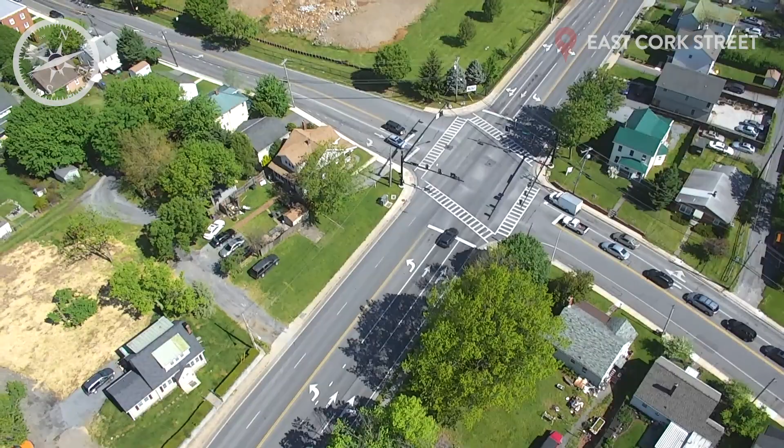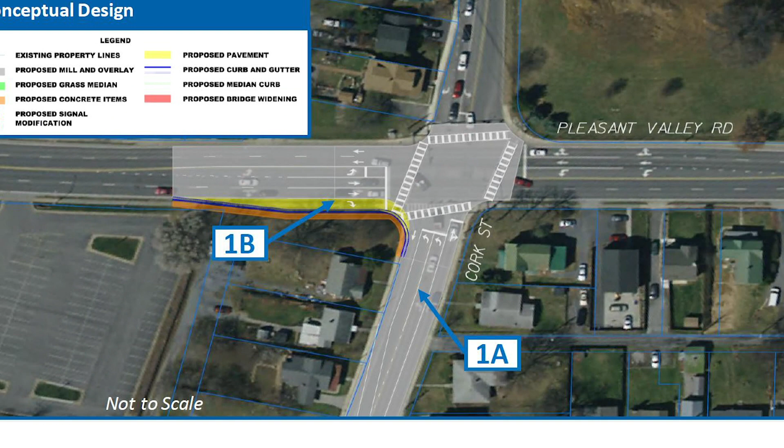At the northern end of the corridor is the Cork Street and Pleasant Valley Road intersection. Two improvements are proposed at this location: adding a second left turn lane on the westbound approach, and adding a dedicated right turn lane on the northbound approach. This additional capacity and updated signal timing will better accommodate turning vehicles and reduce delay during the peak period.

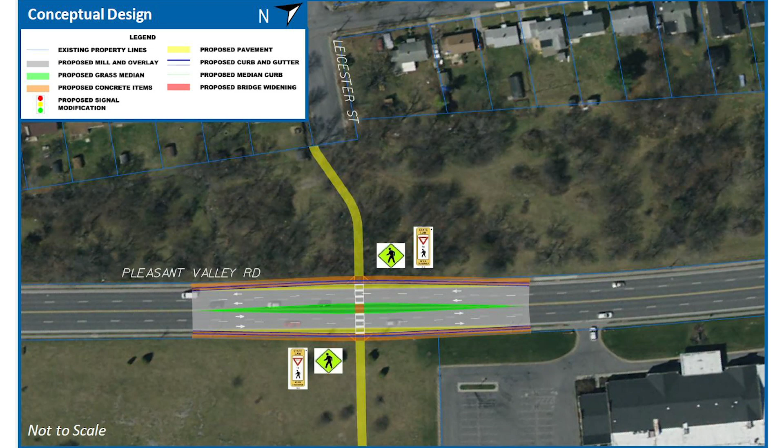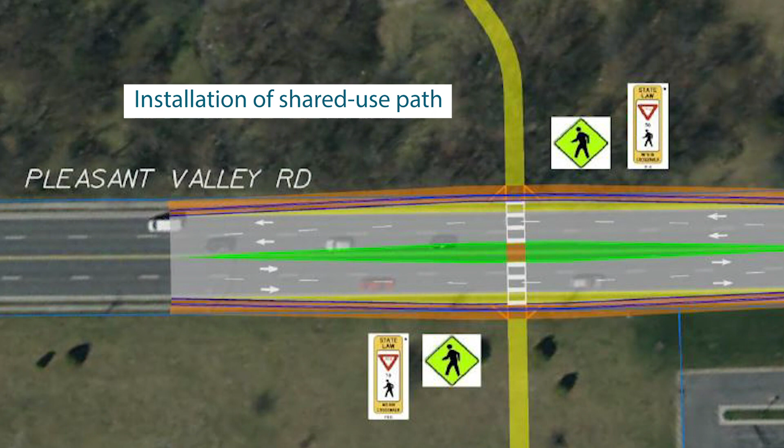Between Cork Street and Hollingsworth Drive at Leicester Street, two improvements are considered: installation of a mid-block pedestrian crossing area, and installation of a shared-use path for pedestrian access between Leicester Street and Jim Barnett Park.

These improvements will provide a dedicated crossing area and address safety concerns for pedestrians along this stretch of Pleasant Valley Road. The shared-use path will improve connectivity between the residential community on the west and the park amenities on the east. The mid-block crossing may be an interim improvement.

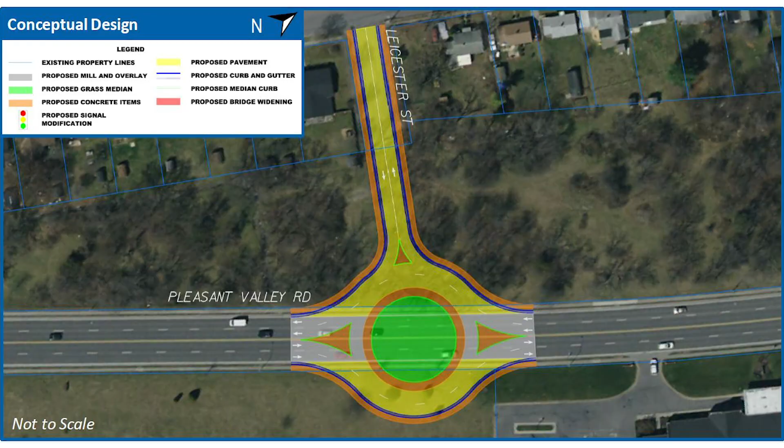At the same location between Cork Street and Hollingsworth Drive at Leicester Street, a potential long-term improvement consists of the installation of a two-lane roundabout. The roundabout intersection would include pedestrian accommodations and vehicular access to Leicester Street. The roundabout and a slight roadway alignment shift will address commonly observed speeding on this segment of the corridor. Future vehicular access to Jim Barnett Park may be accommodated with this improvement.

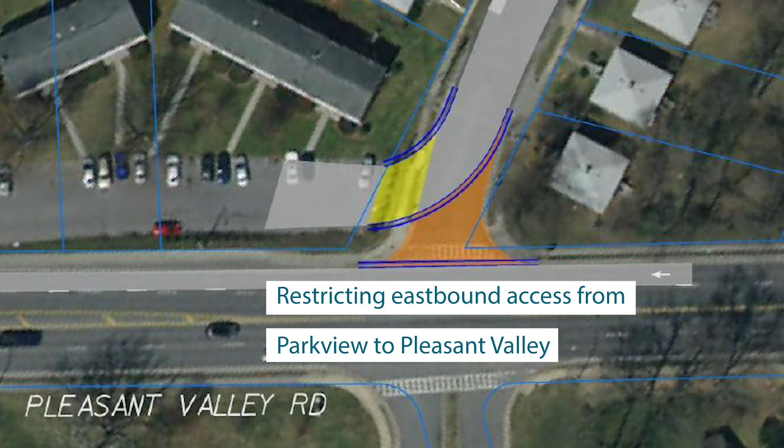At the Parkview Avenue and Pleasant Valley Road intersection, the proposed improvements include restricting eastbound access from Parkview Avenue to Pleasant Valley Road, and closing access from residential units to Pleasant Valley Road. The eastbound section of Parkview Avenue will be turned into a cul-de-sac which connects to the adjacent multifamily units.

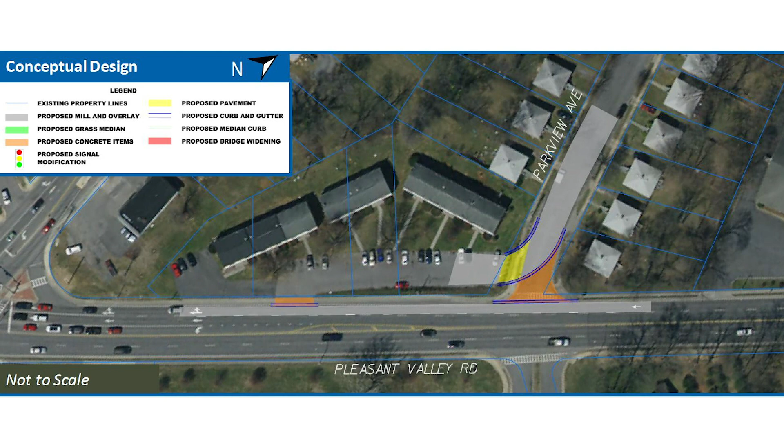Restricting access would require traffic to reroute to adjacent intersections to access Pleasant Valley Road, either Millwood Avenue to the south or Hollingsworth Drive to the north. The improvement eliminates challenges of poor sight distance from Parkview Avenue and reduces the number of potential vehicle conflicts with turning vehicles.

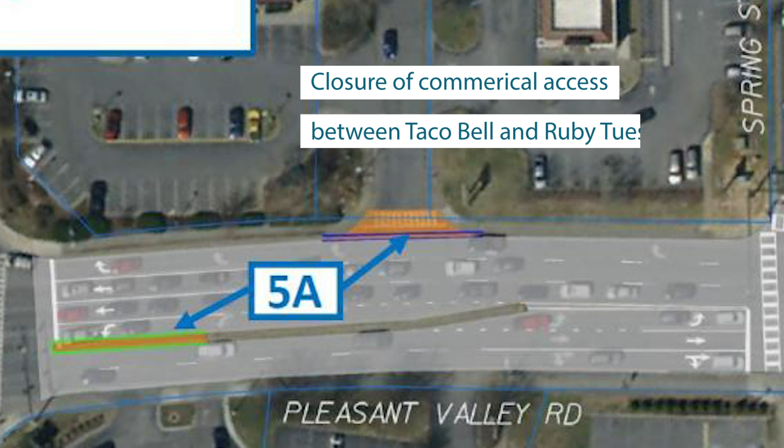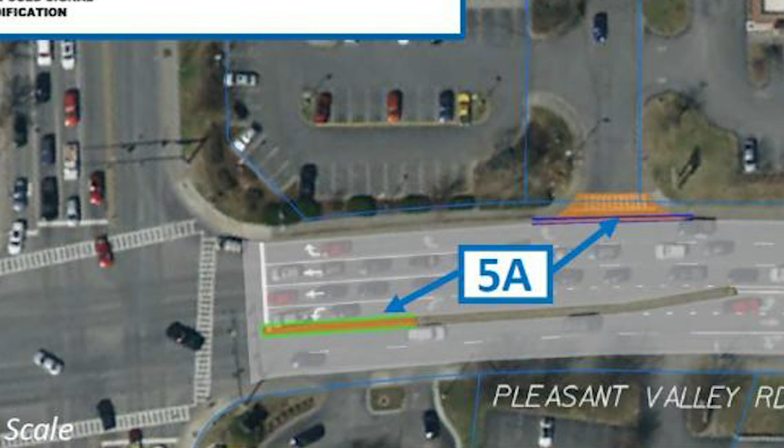Farther south, between Spring Street and Jubal Early Drive, the concept includes closure of the commercial entrance between Ruby Tuesday and Taco Bell, and extending the concrete median on the southbound Pleasant Valley Road approach to restrict access to Starbucks. The concrete median would allow the southbound left turn lane to accommodate left-turning vehicles to Jubal Early Drive. This improvement will eliminate turning vehicle conflict points and address some crashes in the vicinity of the Jubal Early Drive signalized intersection.

This improvement concept also includes removing the northern crosswalk at Spring Street to eliminate the redundant pedestrian crossing.

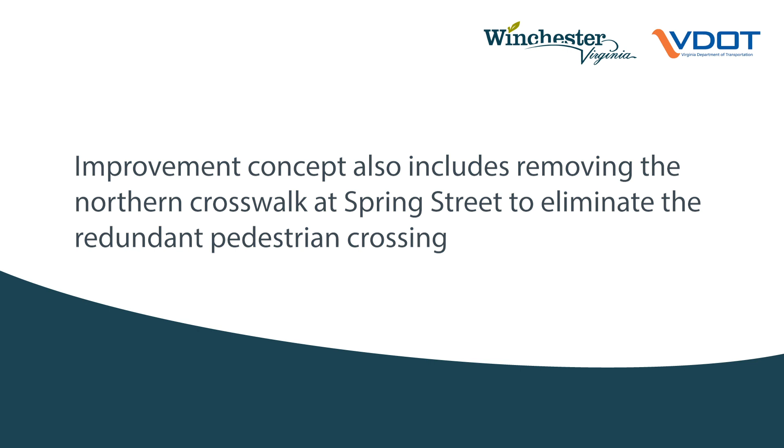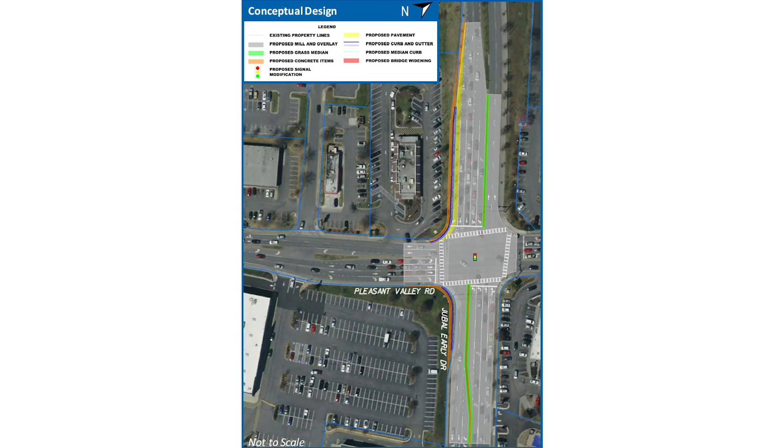The Jubal Early Drive and Pleasant Valley Road intersection is one of the highest intersection crash locations in the corridor. To address the safety and congestion concerns, this project proposes adding a second left turn lane on the westbound and eastbound approaches. Additional capacity for turning vehicles will accommodate peak hour volume and reduce vehicle queues on both Jubal Early Drive approaches.

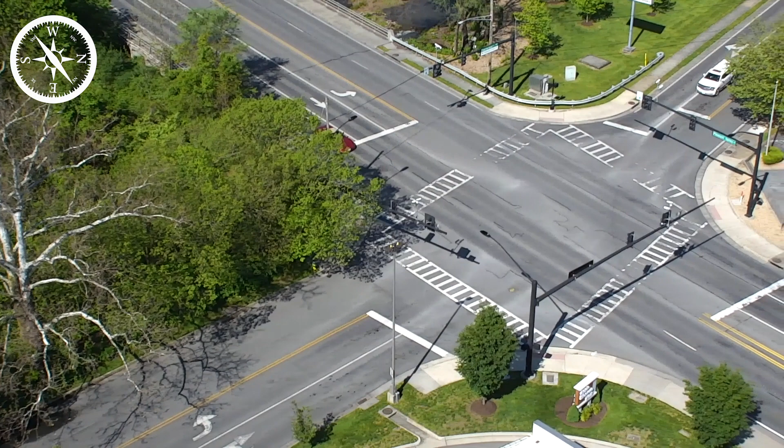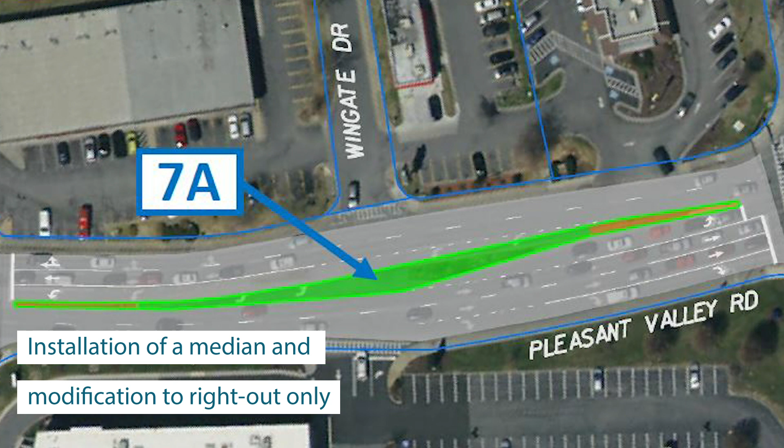Farther south at Wingate Drive and Featherbed Lane, the proposed concept includes the installation of a median and modifying Wingate Drive and Shopping Center Drive access to right in, right out, to reduce turning conflicts and potential crashes at one of the highest U-turn locations in the corridor.

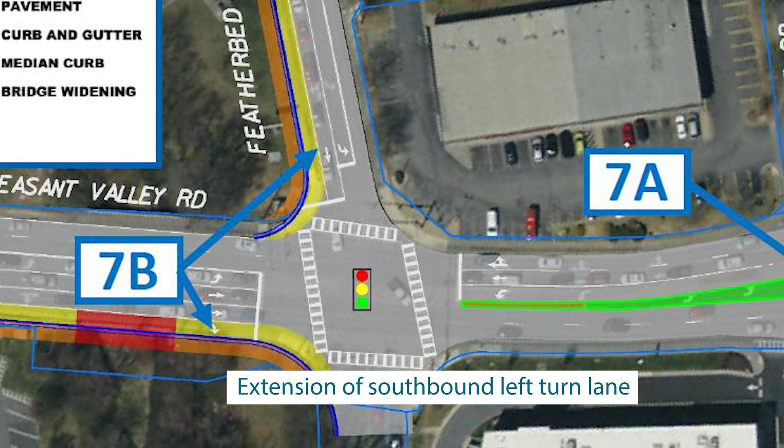The southbound left turn lane to Featherbed Lane will be extended to accommodate more turning vehicles. This intersection improvement also includes adding a dedicated right turn lane on the eastbound and northbound approaches at Featherbed Lane to reduce vehicle queues during the peak period.

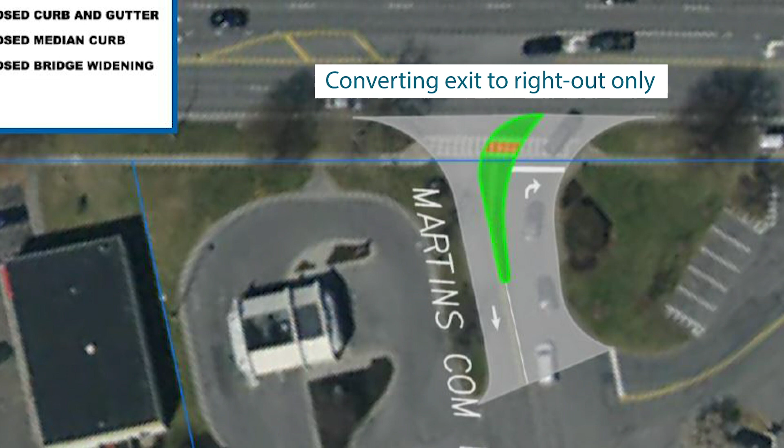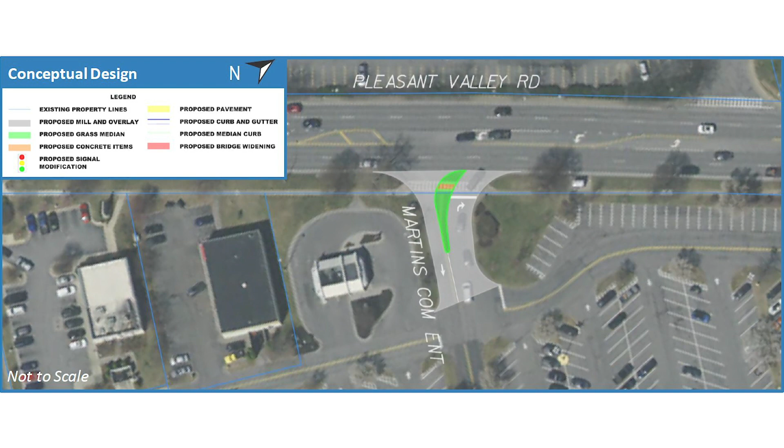At the Martins and BB&T Bank commercial entrance on Pleasant Valley Road, the proposed concept consists of converting the commercial driveway exiting movement to a right-out only movement with a raised island. Left turns will be restricted and redirected to the Apple Blossom Corner main signalized intersection. Restricting left turns addresses safety concerns and reduces the number of vehicle conflict points at this location.

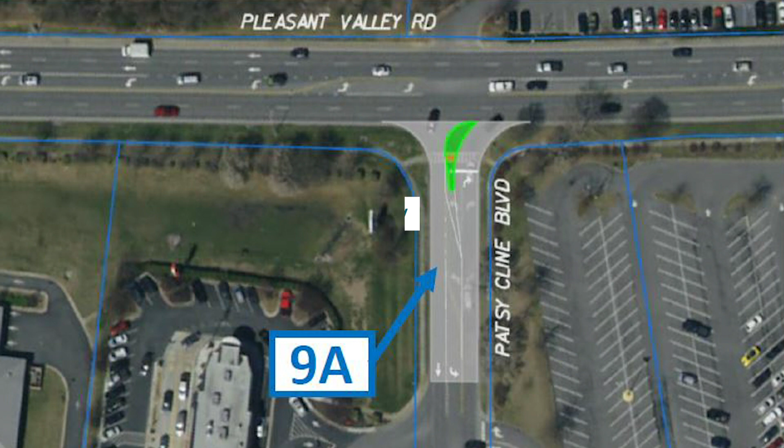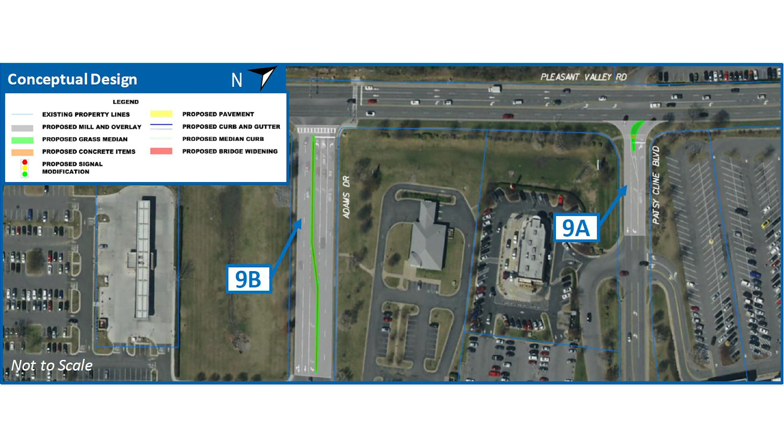At Patsy Cline Boulevard, the proposed concept is to convert the westbound exiting movement to a right-out only movement with a raised island. Left turns will be restricted and rerouted to Adams Drive. Restricting left turns addresses safety concerns and reduces the number of turning vehicles and potential crashes. This concept also includes extending the westbound turn lane from Adams Drive.

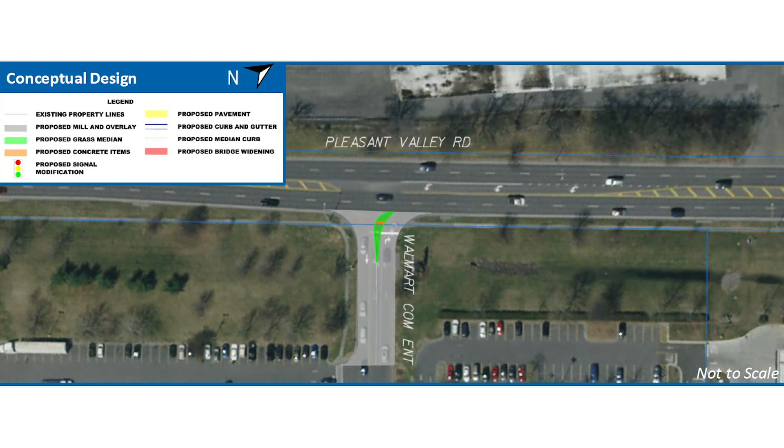At the Walmart entrance, the proposed concept is to convert the westbound exiting movement to a right-out only movement with a raised island. Left turns will be restricted and rerouted to Adams Drive and Tevis Street.

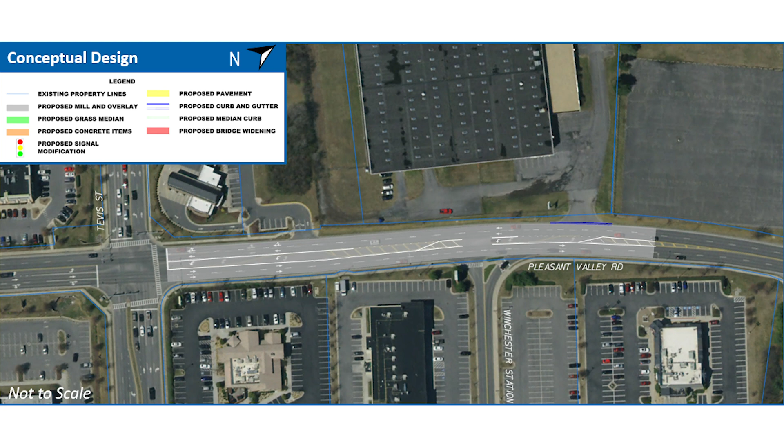The southernmost concept along the corridor at Winchester Station includes closing the commercial entrance to the present-day Nolan property and extending the left turn lane to Winchester Station. This proposed improvement will advance forward only with future redevelopment of the Nolan property. At such time, it is recommended that the site access to this property be aligned with Winchester Station and include an interparcel connection to the bank parcel to the south.